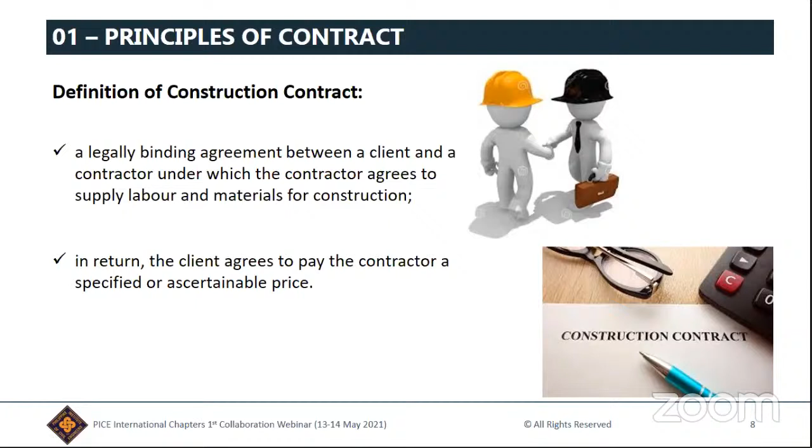So moving on, let us briefly go over the 5 common types of contract, or the different types of payment mechanisms available in a contract. I am sure you are all aware of these mechanisms, so let us have a brief description. The first one is the lump sum contract, where a detailed measurement will not be required. If there are no variations, then that amount is what the contractor gets paid. The contractor is responsible for errors in the BOQ, and changes are measured against contract drawings, not the BOQ. This type of contract is usually applied for building works or any other project type when the client wants cost certainty at the very start, so the cost risk is higher on the part of the contractor.

Next is the remeasurable contract, where it may either have a contract sum or only a schedule of rates. The actual quantities are measured according to the standard form of measurement indicated in the preambles, and the quantities set out in the BOQ are estimated quantities for the works, or say indicative, not to be taken as the actual and correct quantities to be executed by the contractor in the fulfillment of his obligations. So the unit rates in the BOQ or schedule of rates remain within the full duration of the project unless agreed otherwise. This type of contract is usually applied for infrastructure works where the cost risk is higher on the part of the employer.

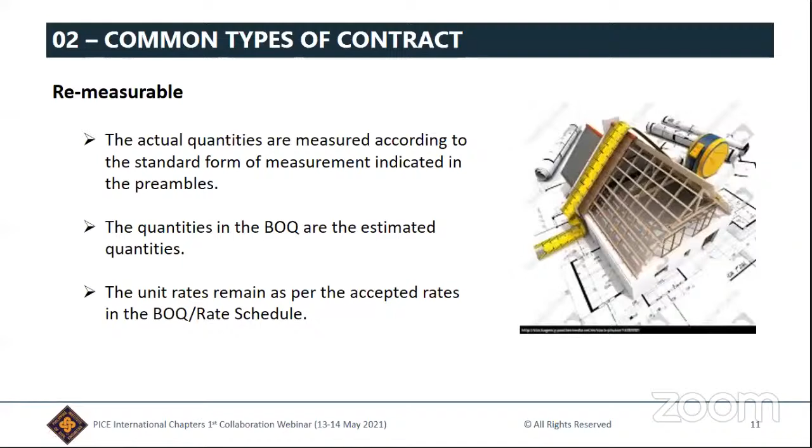Now let us see the next three. There is also a target sum, where a fixed price is established like a lump sum contract for this type, but the overspends and savings will be split between the employer and contractor using proportions as per contract. So it's like a shared pain and gain for overspends and savings.

And then we also have the guaranteed maximum price, or GMP, where a fixed price is established also, like in a lump sum contract, but this should be the maximum. The value can go below and the savings will be shared, but if the value goes above, the contractor will be shouldering it. This is used mostly for EPC and turnkey projects.

And now we have also the cost reimbursable, or cost plus. This type of contract is mostly used for urgent works, like if there is a fire, for example, in a retail shop, the works need to start ASAP, and because it cannot go through the long process of tender, this cost plus is commonly the option. So the employer has to pay for the actual cost incurred in the delivery of the project plus an agreed profit fee. In this case, the allowance for wastage shall not be more than 5%.

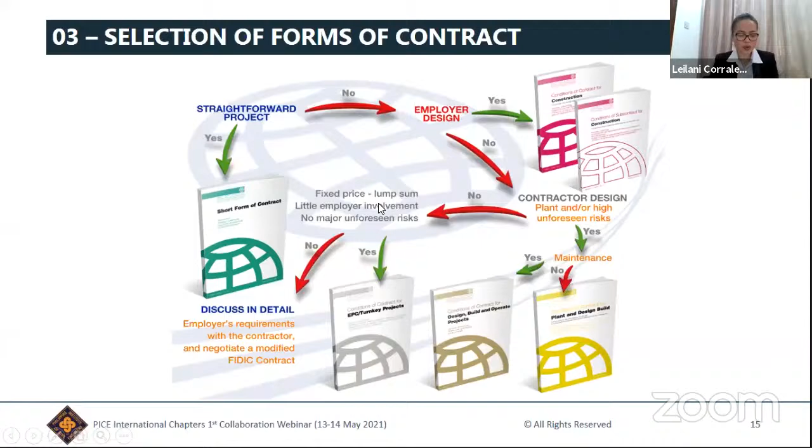So to supplement this decision tree or flowchart-like diagram, I have listed some elements we need to be aware of when selecting a contract: the type of the project, the value of the project, how complex it is, the design responsibility and risk allocations, the level of cost certainty, and the degree of involvement of the employer.

The selection of the form of contract must be established before the tender and procurement stage, because this COC forms part of the invitation to tender documentation or the pre-contract stage.

Since we are already talking about FIDIC, let us identify some key differences of this standard form from the 1987 version, 1999, and the latest 2017. In this slide you will see some of those changes. From the 72 clauses in 1987, it had been compacted and modified into 20 clauses in 1999.

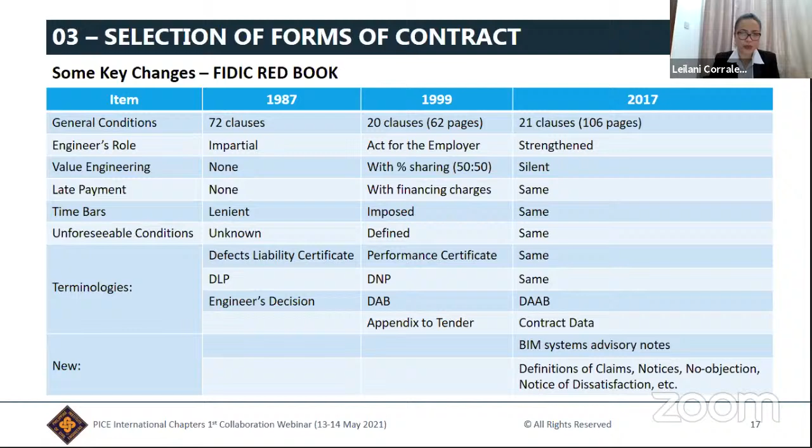I want to highlight the advantages and disadvantages of using a standard form of contract versus the bespoke form. In a standard form, all parties are well aware of the risks, and this has proven and passed the test of time. Could you imagine the JCT, the FIDIC 1913, 1931? When using this form, the contractor's proposal will be competitive, or his tender cost will not be overpriced because of the contractor's familiarity with the clauses and risks. Post-contract disputes are likely to be less, and for any ambiguity, there are precedent court cases which can serve as references in case a conflict escalates into a dispute.

The disadvantage of using these standard forms is when a client modifies a lot of terms in the appendix to tender, which is very common in the GCC region. If this is done without good professional advice, it will create more ambiguities in the contract.

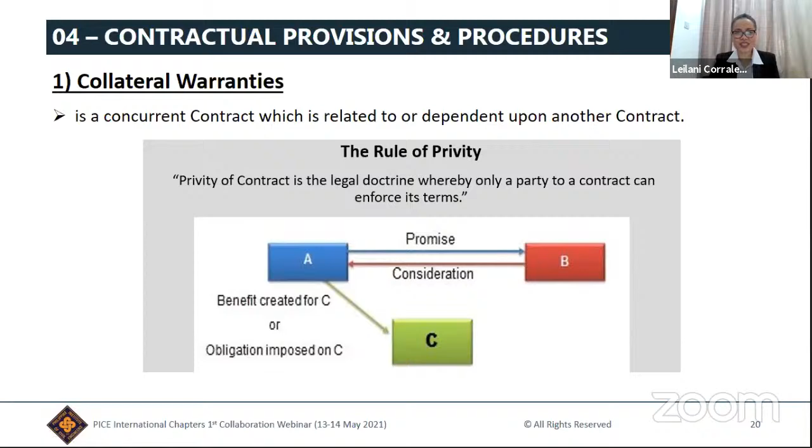Now, in an ideal situation, the collateral warranty agreements are issued anytime after the signing of the original contract between the contractor and the subcontractor, in favor of the employer.

However, in most of the project experience I have dealt with in main contracting, the CWAs are commonly issued at the last stages of the project, or it had been made as one of the conditions for closing out. So if at the start we are busy issuing and finalizing subcontract agreements, at the last stages we are as well busy issuing and collecting collateral warranties from the subcontractors in favor of the employer or the end user.

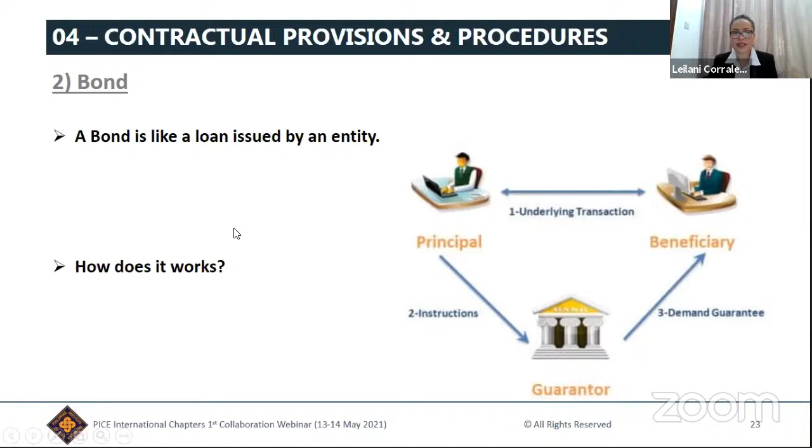So the bonds commonly found within project documentation are the following. First is the performance bond. As said earlier, this is a security for the employer in case of the contractor's non-performance of his contractual obligations.

We have also the advance payment bond. This is a guarantee for the employer that they will be able to claim back all or part of the advance they have paid to the contractor, in accordance with the commercial terms of the contract. The value of this bond is dependent on the amount issued, and it will expire once the advance payment is repaid.

Then we have the retention bond. This is an alternative to the normal withholding of an amount from the contractor's periodic progress payments. This may reduce when the taking-over certificate of the project is issued, and the remaining value becomes valid until the expiry of the defects notification period or the issuance of the performance certificate.

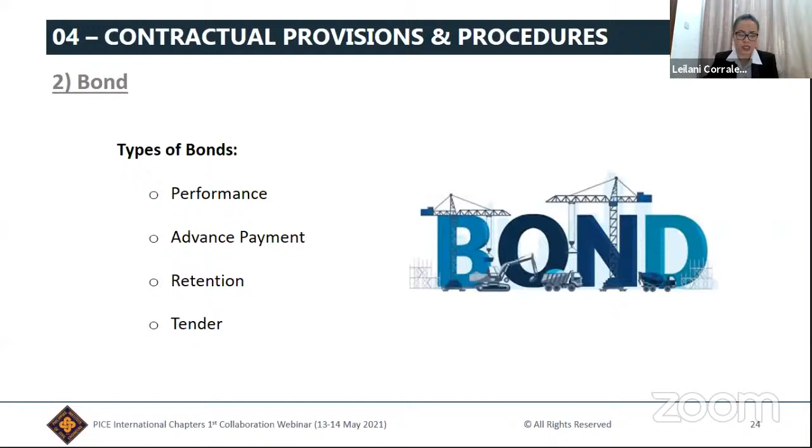The calling of the bond is considered unfair under the common law. If a bond is liquidated, it will significantly affect the contractor's cash flow, his reputation, and even his future business opportunities will also be affected. That is why in the contract, there are protections and remedies for the contractors.

This could be ensuring that the bond has a fixed expiry date rather than being conditional on the expiry of the defects notification period or the issuance of the performance certificate, which can normally be extended far longer than planned. So some performance bonds contain notice provisions, which give the contractors time or an opportunity to remedy any default.

Next is the provision of compensation clauses. Like in FIDIC 1999 clause 4.2, it says that employers are obliged to compensate all damages, losses, expenses, including legal fees, to the contractor where a wrongful demand of a performance bond has been made. This clause is a good protection to the contractor. The employer cannot just call the performance bond without any valid basis. The contractor can also obtain an injunction from courts.

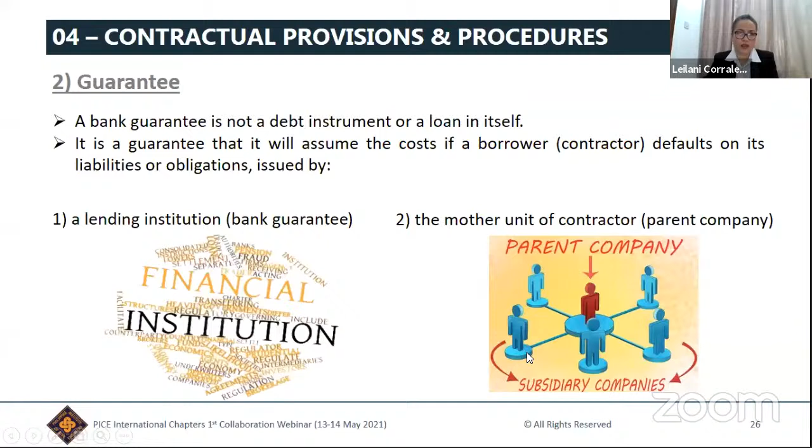Now let us move on to insurances. Insurance is defined as an equitable transfer of a risk of a loss from one entity to another, in exchange for a payment in the form of a risk premium. It provides financial compensation for covered losses, as many mistakes, errors, and unforeseen events can lead to damages and losses during pre and post-construction stages.

The risks are defined either under the contract or under the law. Risks under the contract could be natural calamities like flood, typhoons, major fire, or anything that destroys the work or impedes delivery of the project, or risks defined under the law. An example of this is decennial liability, which we will be tackling a bit later.

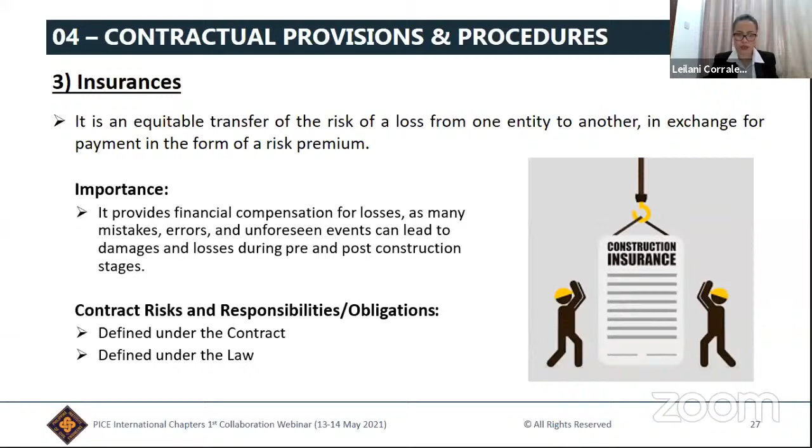So what are the insurances that you would expect to see in a construction project? Here, for the JCT and FIDIC forms, there are 3 common insurances, although you may notice slightly differing terminologies. These are the insurances for the works and the contractor's equipment. Under JCT, it is called the contractor's all risks, while in FIDIC versions, works and goods.

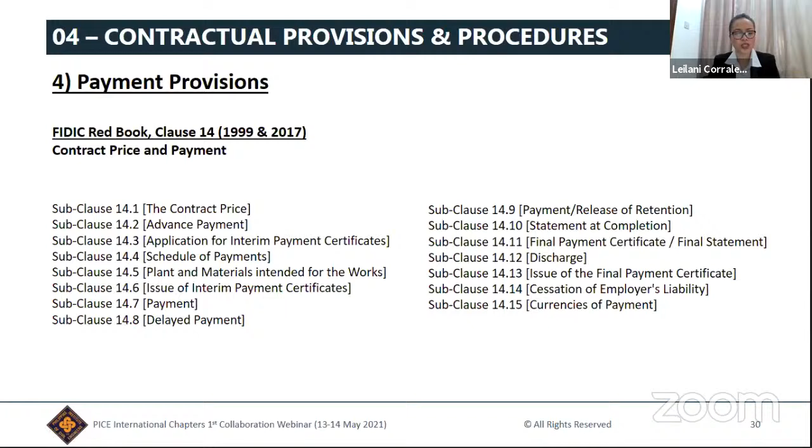Okay, so my next question is how important payment is. That is the next slide. So payment provides benefits to everyone, right? It keeps a smooth functioning of the economy, not only to the contractor, but anyone down the payment chain.

So the first one is the advance payment, which is an interest-free loan for mobilization purposes. This payment is released when the contractor submits the advance payment guarantee and performance guarantee. Sometimes as a precondition to the release of the advance payment, the insurances or proof of insurance buying and payment expenditure plans for subcontract practices are also added to the requirements. So it depends on the contract, what else is added for the prerequisite of releasing an advance payment.

And then for the interim payments, this has to be paid by the client on a periodic basis, normally on a monthly basis, for the purpose of relieving the contractor of the burden of financing the whole of the works until completion, especially for projects which may take months or even years to complete. So it basically helps the contractor in his cash flow.

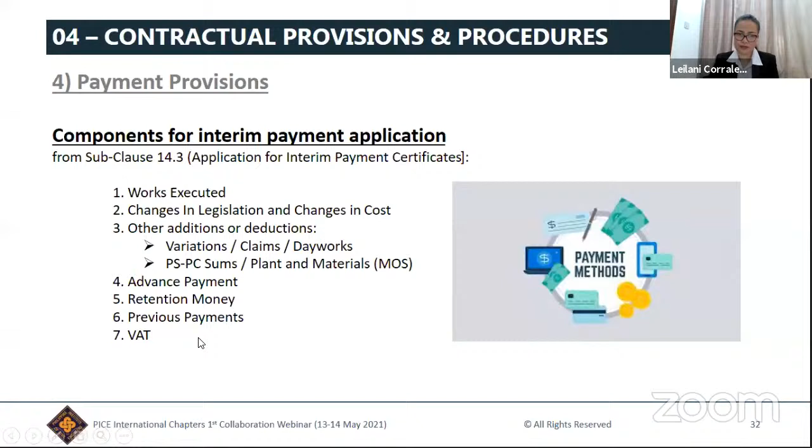Now we proceed with how important evaluation process is.

This is a formal contractual process actually, being done whether in advance payment, interim statement, at completion, or final account, which normally follows a method and criteria for valuing an activity. So the works applied by the contractor shall be validated and issued with a payment certificate by the engineer in respect of the FIDIC standard form, or the contracts administrator in respect of the JCT, or the project manager in respect of the NEC.

So the meaning of value is sometimes, oftentimes, the subject of dispute. I hope you agree with me on this. From the contractor's point of view, he may say that the value is found in the BOQ, where we are entitled for what has been done at bill rates plus a proportion of the prelims, which is correct. But from the client's point of view, he may say that the value is the whole of the contract less the cost of completing the work, which is as well logical.

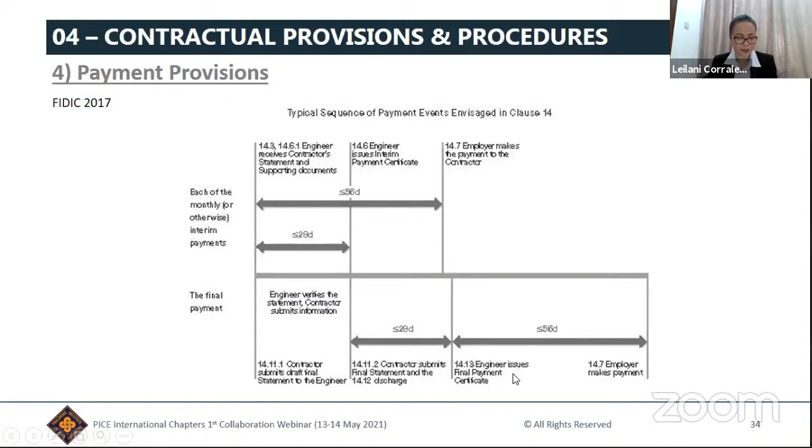Okay, let us proceed to another interesting contract provision, which is the variation or the change order. Let me just have some water.

Okay, we are in variation or the change procedure. So in JCT and FIDIC, the description of change is called variation, okay? While that of the NEC, it is termed as compensation event. So interchangeably, we are using all of these terms actually in our work.

So when does a change arise? Actually, there are many events that could result to change or alteration to the original contract, and this includes the ones on your screens now. It could be changes to the design, changes to specifications, method statements, scope of works, and to statutory requirements if there are new legislations or repeal of existing regulations. Also changes to specified sequence or timing or to the program. It also includes the events of force majeure, or the use of technical innovations or new technologies, and if there are unresolved qualifications prior to contract signing, and value engineering activities as well, among other things.

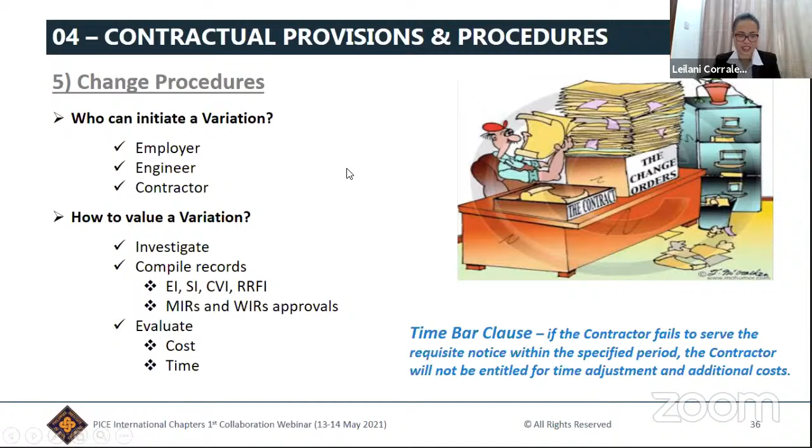Another item related to claims is the extension of time. An extension of time is defined as the extended period granted to the contractor under valid events, allowing him to achieve completion of the works as per the agreed revised date.

As per FIDIC Red Book of 1999, subclause 8.4, the EOT events can be due to variations, cause of delay as per the contract conditions, and adverse climatic conditions. It could also be due to shortage of labors and goods, and of course, employer's default.

By general principles, an employer's delay is categorized as excusable and compensable, while a neutral delay of employer and contractor is categorized as excusable but not compensable. We also call this neutral delay a concurrent delay, where both parties shall bear their own loss.

An extension of time will be awarded at the expense of the employer, but no cost for the contractor, so the contractor will bear his own loss as well. In the Society of Construction Law Delay and Disruption Protocol, it favors the grant of EOT but no cost in case of concurrent delay, unless the contractor can separate out the cost related to his delays and the delays caused by the client. So the onus lies within the contractor, and it is somewhat difficult to proceed with this.

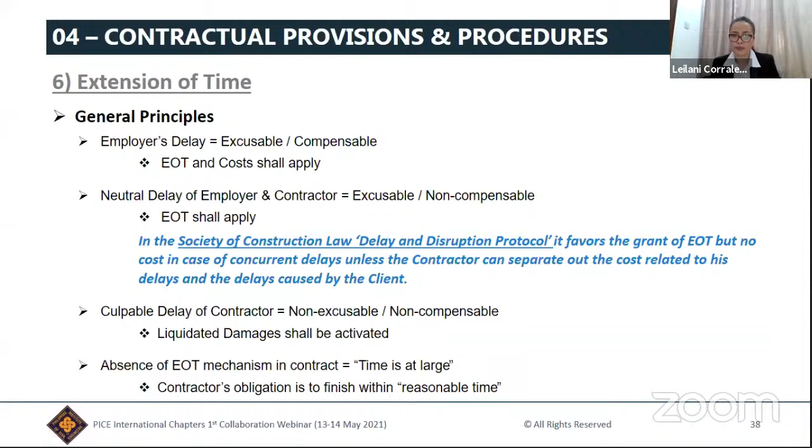So for the unforeseeable physical condition, discovery of fossils, and even the suspension consequences and changes in legislation, employer's risk and force majeure, all of this warrants for an extension of time with associated cost, but not for the profit.

It could also be due to variations or other substantial changes to the work, where EOT or extension of time and cost and even profit shall apply.

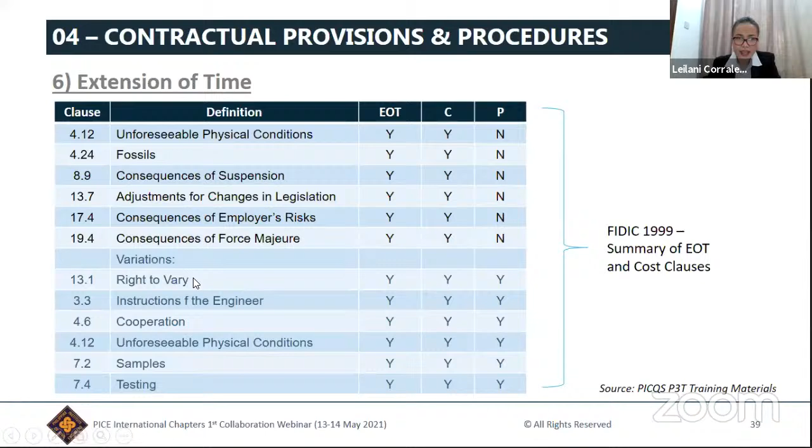Also for implied variation, sometimes dependent on the nature of that variation, EOT, cost and profit will all be applicable. And then for exceptionally adverse climatic conditions or unforeseeable shortages of availability of goods and personnel even, caused by epidemic or governmental actions, and even delays caused by authorities, it warrants also for the extension of time, but not for the cost and profit.

I just want to add that in the award of an extension of time, there are delay analysis techniques used by the planners, like the impacted as planned versus as built, collapse as built, time impact analysis, window analysis. Yes, so these all fall under the jurisdiction of our planners.

So I repeat that an award of an EOT may not always come with cost. When an EOT is determined, and if that event falls within the compensable category, the contractor can as well be entitled to a prolongation cost, which normally covers admissible items like the site overheads or the preliminaries.

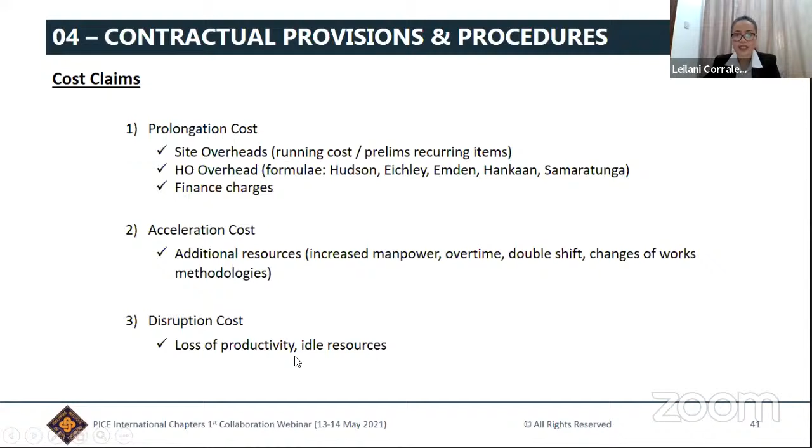And finally, we are in the dispute resolution and arbitration clause provisions. Actually, there is no better way to address issues and resolve conflicts before they escalate to dispute than by using dispute resolution techniques, which are introduced as part of the civil code rules.

And then we have also the mediation, where a private and structured form of negotiation assisted by a third party that is initially non-binding. However, if the settlement is reached at this level, it can become legally binding as well. The result will be legally binding dependent on the agreement of both parties.

So we have also the conciliation. It is the same as mediation, only that the third party conciliator can propose a solution, contrary to that of the third party mediator. The mediator is there only to listen and to facilitate the negotiation.

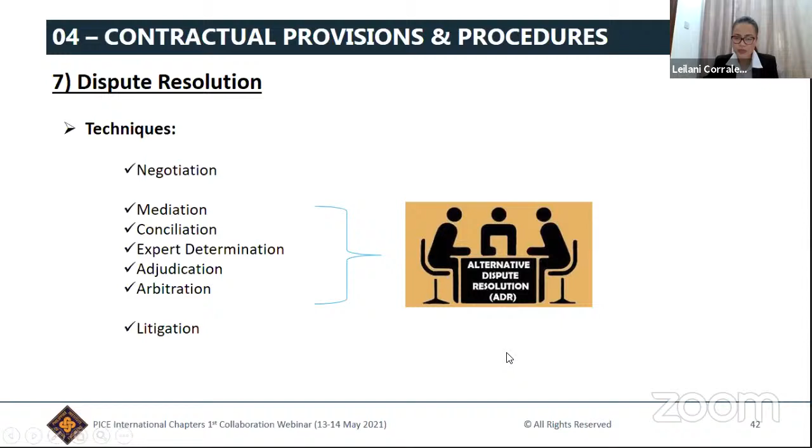In a construction contract, this dispute and arbitration clause is very vital because we all know that the construction industry is subject to more risk and potential disputes than many other industries because of the physical nature of the product itself. The projects can be very large in size, require high capital requirements and wide geographical requirements, and the parties involved are too many.

So the causation of disputes is also wide ranging. It can be from the employer, due to changes in requirements, or because of many contract ambiguities, or even late issuance of payment to the contractor. So those are causes of dispute.

And then from the engineer and consultant side, due to design issues and inadequacies, it could be due to late issuance of drawings or information and even determination, and lack of competence and experience.

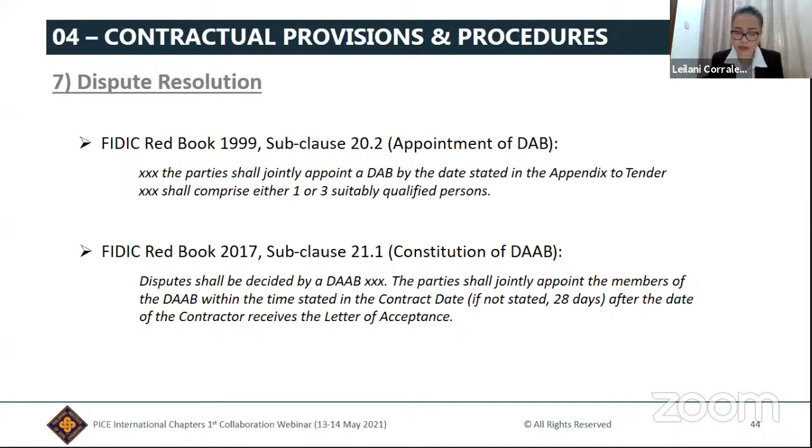So the last contractual provision is the termination. Termination can be done mutually or through court order. In the FIDIC 1999 Red Book, clauses 15, 16, and 19 include the basis of termination. It could be done by the employer due to the contractor's default or due to convenience purposes.

So the only difference between default and convenience is that for default, the employer can terminate the contract and award the project to some other party to complete it, while for convenience, he will terminate the project not for the purpose of awarding it to another entity.

For the termination by the contractor, if the contractor is suffering delayed releases of payment, then that is one ground for applying a notice of termination to the employer. Under clause 19, force majeure, if the situation is prolonging, then either party can submit a notice for termination.

Okay, so there you go. There will not be a good way or good time to terminate.

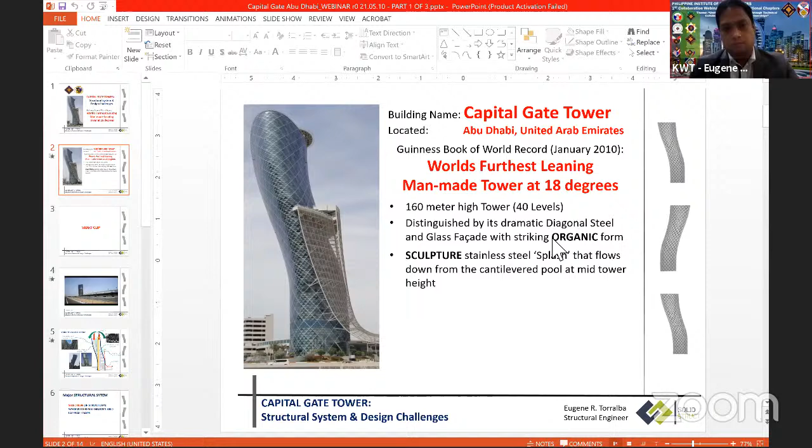Okay, so the project is called the Capital Gate Tower, situated in Abu Dhabi, in the United Arab Emirates. In January of 2010, the project was recognized by the Guinness Book of Records as the world's furthest leaning man-made tower at 18 degrees. It was 160 meters, basically 40 levels.

For now, if you pass by the exhibition area, it will be distinguished by its dramatic diagonal steel and glass facade with a striking organic form. There's a sculpture, a stainless steel splash as we call it, that flows down from the cantilever pool at mid-height level, as you can see in this portion.

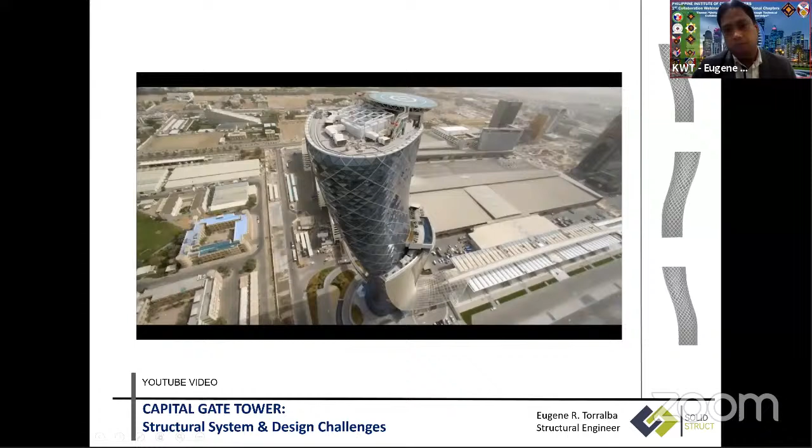Okay, that was a short video, and there's a lot of video available for this project on YouTube actually.

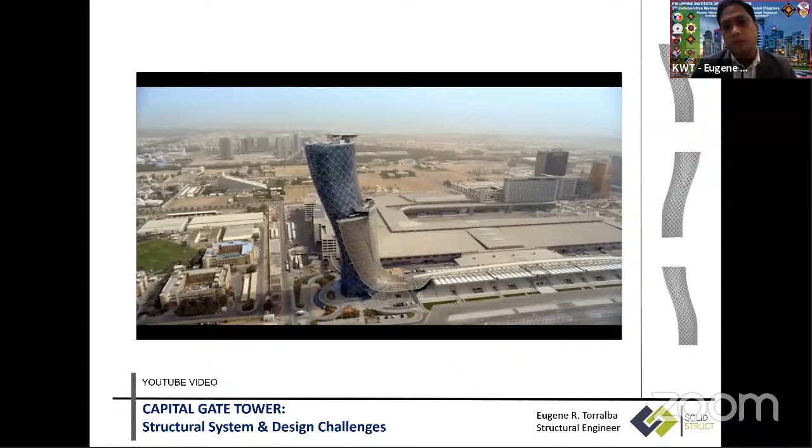Okay, so let me first discuss the system in general. The first system is what I call the vertical elliptical core, which, if you can see the organic form, is the only vertical element of this structure. Then we have the external organic form on the other side, which is basically what the architect intended to achieve. There are two videos of the actual construction showing how this organic shape was formed.

Internally, there is what we call the funneled shape atrium inside. Architecturally, during the design, they wanted to invite natural light from the top, so it will serve as providing natural light to the restaurants that they will have in this area at mid-height. Right now, half of the project, the lower portion, until the halfway point, is the ADNEC office in Abu Dhabi, and the upper half is now called Capital Gate Hyatt Hotel. The main lobby, or the reception area, will be found there. That's one of the features of this tower.

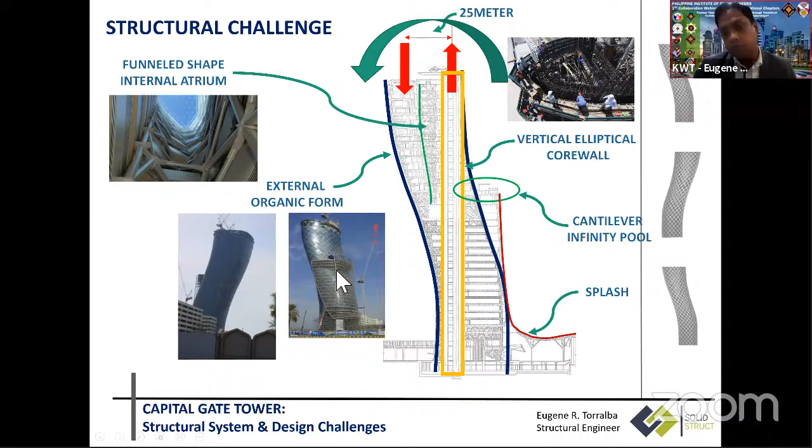And in the mid height of the building, there is what we call the cantilever infinity pool, which is on this side. And from there, what we call the splash, which is this aluminum stainless organic shaped screen, is actually hanging from that cantilever, full down until it merged to the existing

exhibition hall grandstand, which is the main historical place in Abu Dhabi. So the idea when we were discussing this with the architect at that time is that since the grandstand is a very old structure with very simple precast seating for military exercises, and beside it you will build this very modern building, they wanted to have this splash from the tower go over to the old exhibition area, so that it will create some harmony between them.

So my discussion is basically going to be on how we managed to solve this building by introducing to you the major structural system for the building, and the selection of the structural system to resist both gravity and lateral loads.

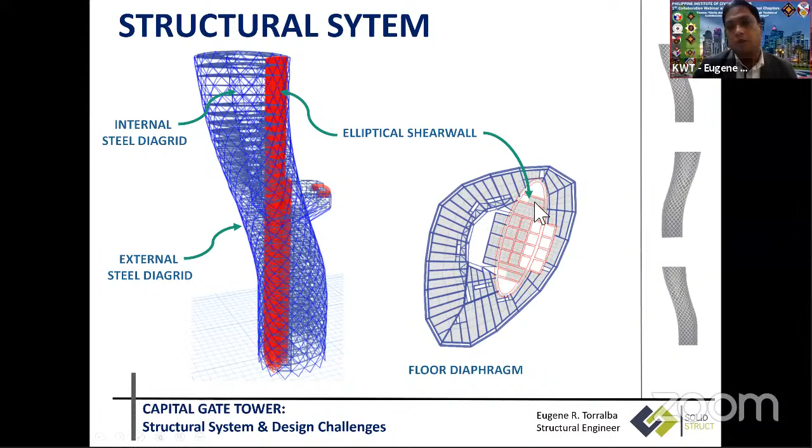On the outer skin, we have the external steel diagrid. Internally, where we have the internal atrium, we also use another internal steel diagrid. The floor, of course, will act as a floor diaphragm.

And then in the middle, or in the heart of this building, there is one column that, when I started reading some documents and articles that people wrote about how this building was solved, was the only one not discussed by anybody, as far as I know. To tell you honestly, this was the last addition to the system that we introduced as a team, because we were not able to solve a lot of areas without it. This addition contributes a lot to the structure, but it was never noticed because it's inside the structure and not visible at all. So I call it the inclined column, which I'll be discussing later on, one by one.

And the last one, of course, after all the systems of the superstructure, is what we call our deep pile foundation. So this is how we support it on the ground.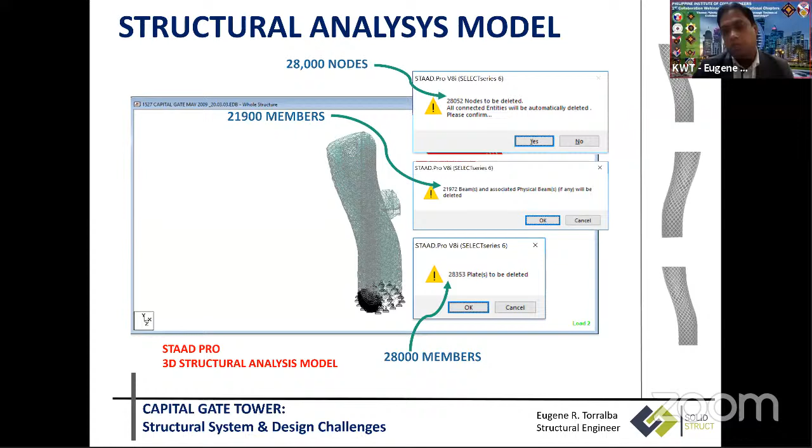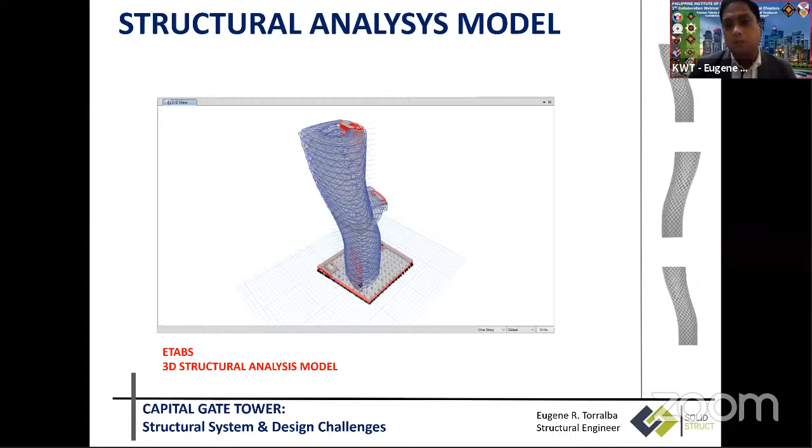So I did it again using the ETABS structural analysis model, which you can see on the screen. I captured it and I was able to complete it also. And finally we got some sort of analysis that shows how the loadings, etc. will take place, so we can start with the design process.

As you can see in the video, I was fortunately able to get a copy because it was a very long time ago, but at least it's still running. To tell you honestly, during the time I ran this model, around 2007-2008, it took me 8 hours to run one run for this structure.

So anyone, especially those working in structural engineering, will realize that it took a lot of time to run. And since we do a lot of iterations in the structure, because in the beginning the system is assumed and the sizes are assumed, every time we change one member's size, for example, we have to rerun it. And 8 hours means when I reach the office, I have to click the run button and wait until the end of the day to see the result, whether it's passing or not.

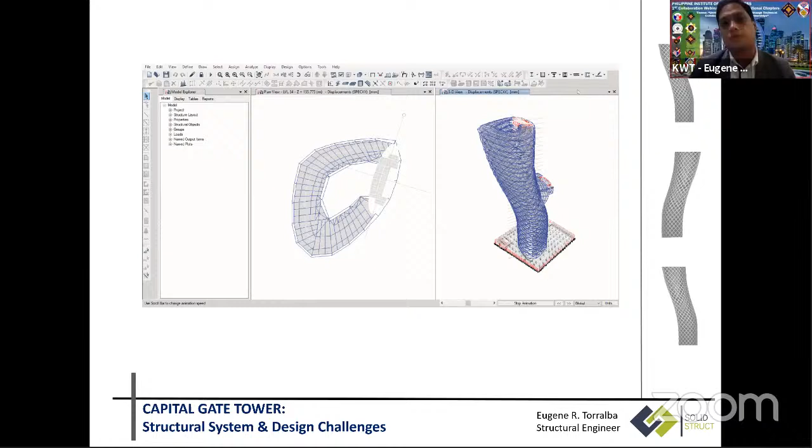Okay, I'll open my next slide. The slide is a bit heavy because of the videos, so I couldn't put it all in one. But just bear with me, I'll open my next slide.

So I will discuss to you now the system. Okay, let's start. Basically, if you can see here, I have listed the structural systems that comprise the structural solution of this.

The video seems unclear, there are some messages. Hello? It's just buffering, sir, a bit laggy. I think there's something wrong with my video. It's okay, sir, just a bit laggy, but it's still there. Okay, try sharing again. Okay, let me share it again. One minute, what's wrong? Okay sir, we can wait.

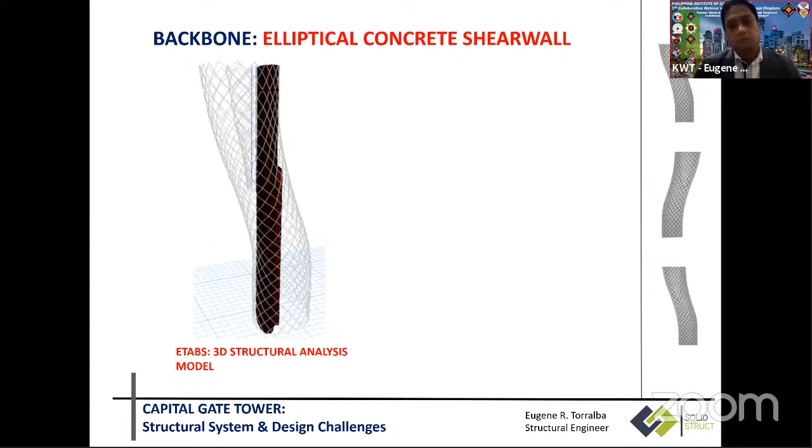which is the elliptical core concrete shear wall of the building. As I mentioned earlier, this is the straight portion, or the only straight portion of the structure, which is elliptical in shape, as you can see here in plan. I call it the backbone, and I was relying on this to keep the structure upright.

I'll show you the plan. These are the plans of the tower, where you see on the ground floor. If you notice, the elliptical core is actually on the left side of this floor plan, but you have to imagine that the core is actually the straight part. So as you go up, the floor plan slightly shifts to the left.

You see, on the 19th floor, you can see the difference between the shear wall, the elliptical shear wall, and the floor plan is more to the left, until it reaches the topmost, which is the 30th or 35th architectural floor level, but actually it's like the 40th structural level. So you will see the elliptical core, the straight part, at the rightmost of the floor plan. That's the transition, so it's clear that the floor plan shifted.

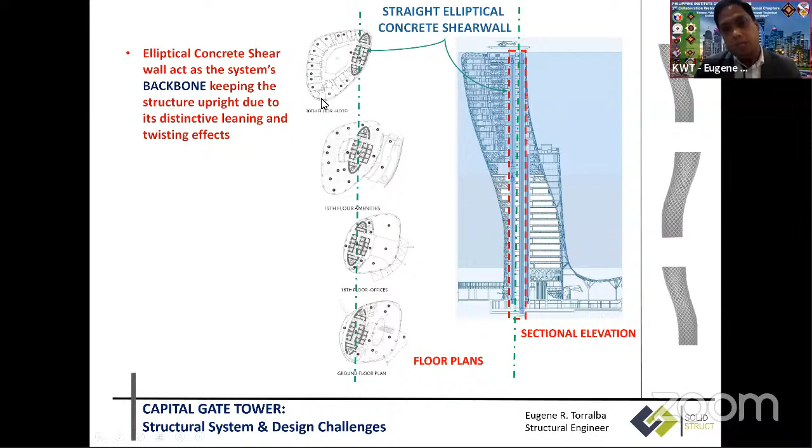Taking the elliptical concrete shear wall as our reference, it acts as the system's backbone, keeping the structure upright due to its distinctive leaning and twisting effect. I said twisting because at the same time it shifts from this position towards the left, the mass of the structure shifts too, as you can see here. This is the elliptical core at the top, and you can see more or less where the mass of the structure is located.

Compared to the one below, maybe the mass is very close to the center of mass of the structure, which is somehow very close to the core or in the middle. So at the same time it shifts, and at the same time it twists.

The core construction actually utilized a lot of innovative techniques. Number one, which is also number one as far as I know in the world, is that we use a pre-cambering shear wall. This is also a technique that we use to solve especially the drift issue of this building. We use a pre-cambering wall, and we also implement vertical pre-stressing on the concrete shear wall.

As a lot of designers normally see pre-stressing or post-tensioning on a slab, meaning on the horizontal element, because this is where it is effective. Since, for example, a column or shear wall is predominantly in compression, if you add vertical pre-stressing, people will think you're crazy because you're making the situation for the column or core wall more critical by adding this vertical pre-stressing.

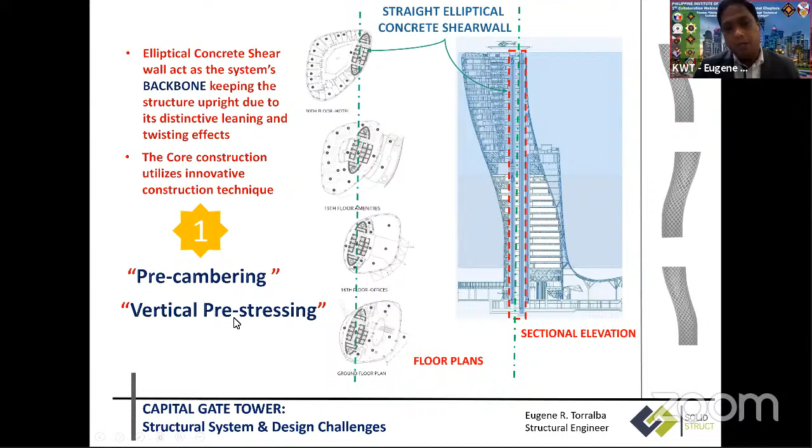Let me show you a video on what it is.

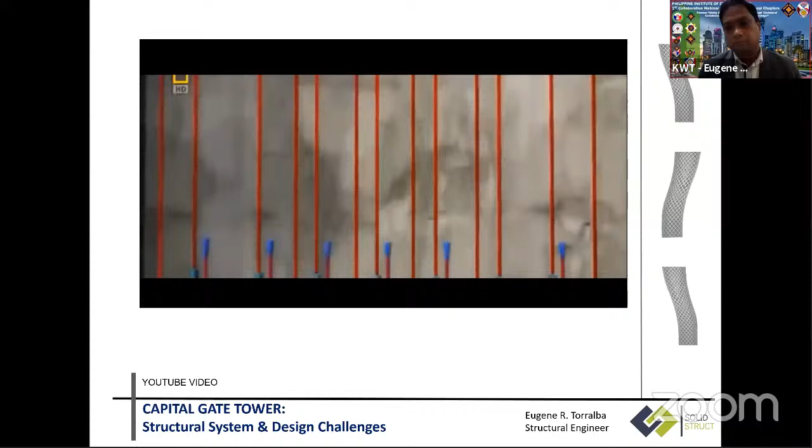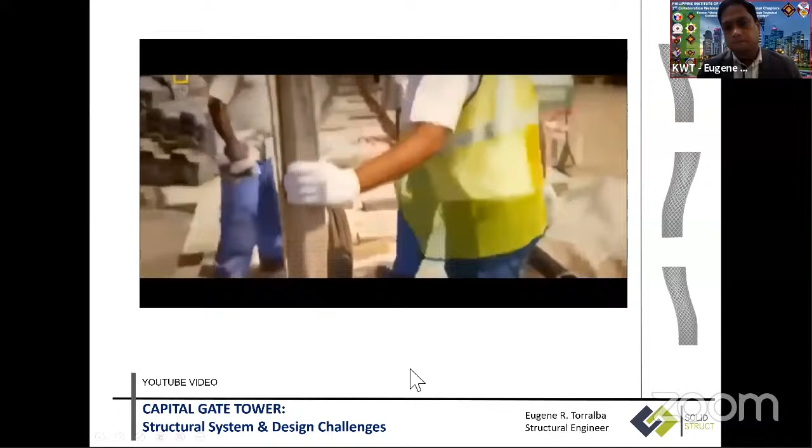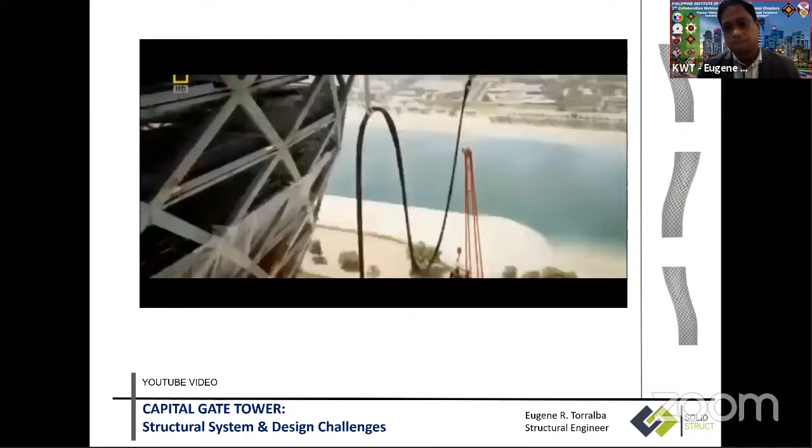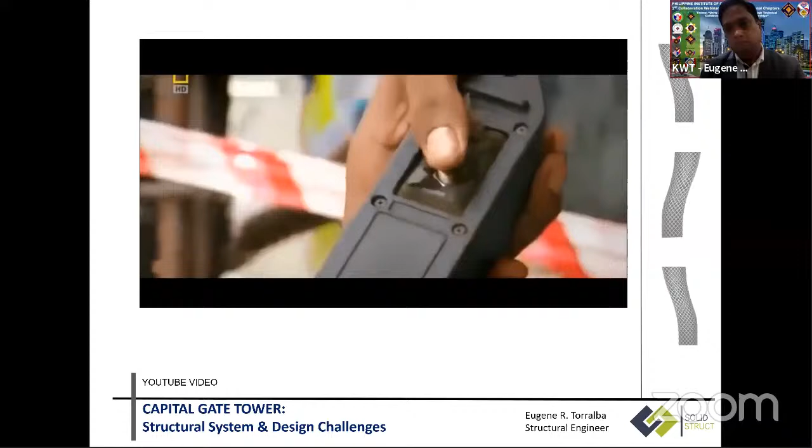Tendons are threaded vertically through the concrete. Each tendon is 20 meters long and runs through 5 floors of the building, overlapping each other for maximum strength. When the tendons are stretched, the stress counteracts the pulling force created by the massive overhang, stopping the concrete from tearing apart. On site, the team are post-tensioning the core, but no one has ever attempted this vertically in a skyscraper. The long tendon is lifted to the top of the core. The team used the steel tendon's weight to force it through a duct already cast through the core. Once the tendon is in position, the team lock off both ends, ready to tension its individual strands. A hydraulic jack clamps around one.

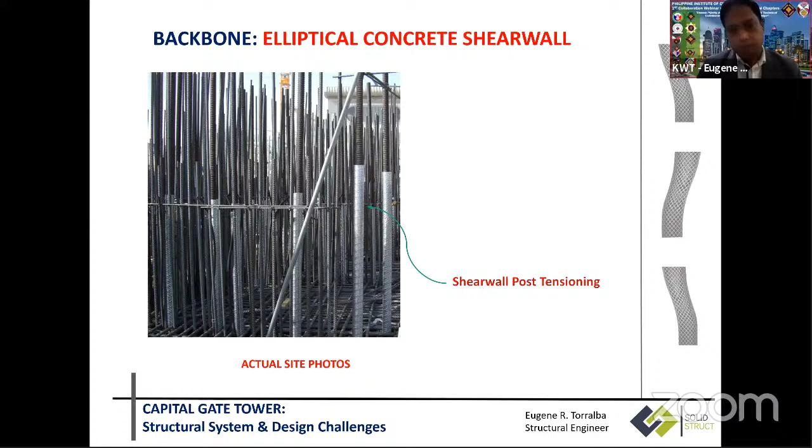Steel tendons are threaded vertically through the concrete. In the actual photo, you will see that there are tendons that are part of the vertical reinforcement of the core wall. These are the shear wall post-tensioning tendons, and this is also an actual photo of the overview of the elliptical core wall when it reached the upper level.

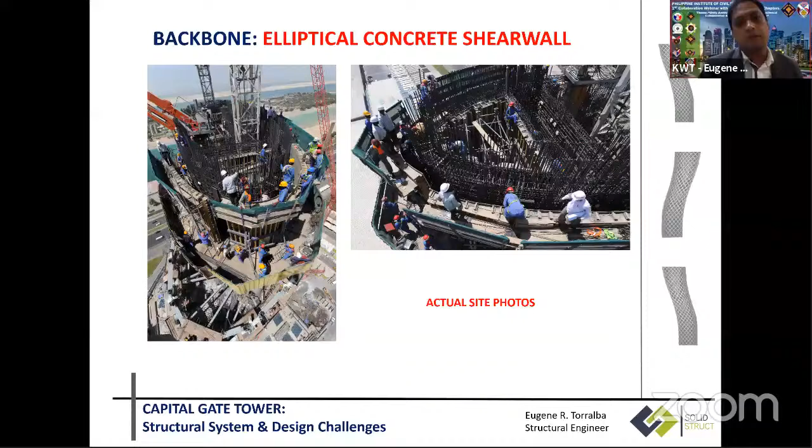Considering the fact that the organic shape has been approved, and this is what the client wants for the country, probably because this is for the country in the exhibition area, we tried to find a system that can shape similar to the architectural intent. This was probably the only option that we could go with to satisfy the intent of the project. So the only options at that time were whether it's a concrete diagrid or a steel diagrid, and eventually we selected the steel option.

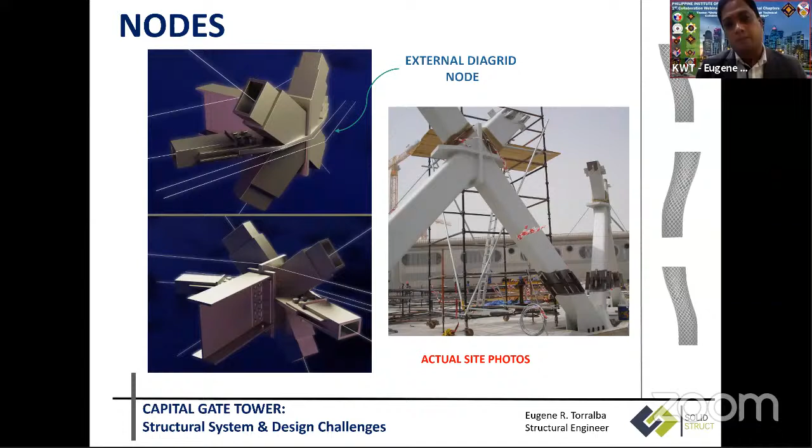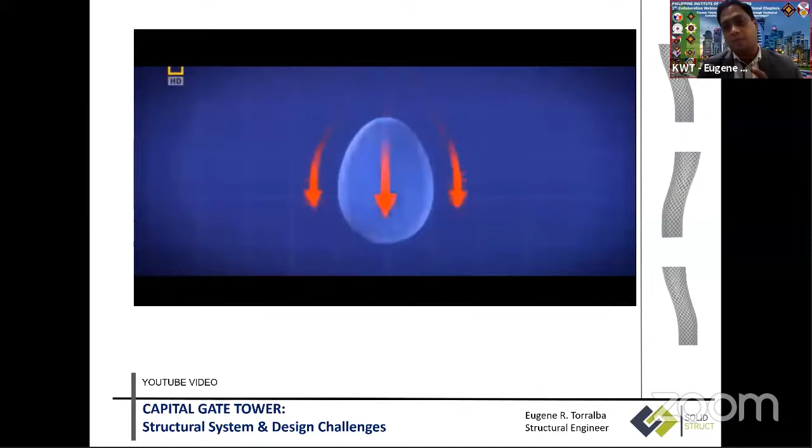So you have to have some beams or members in the out of plane, to hold it into shape, to keep its position out of plane. Kasi in plane, it will act like a membrane, which is very, very strong.

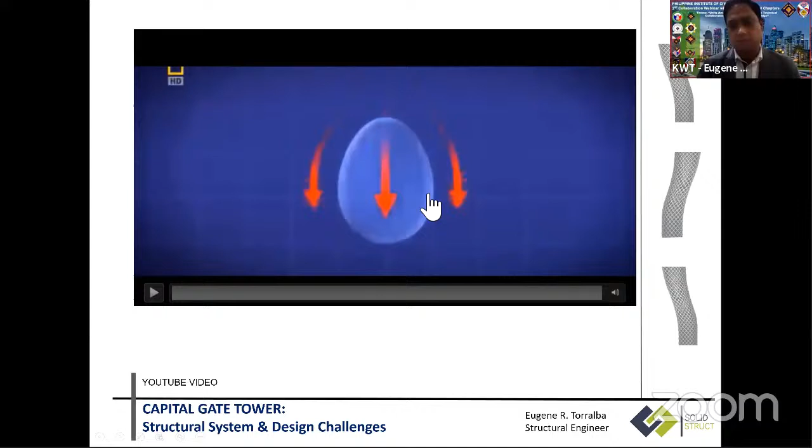Okay, next is the internal diagrid, which I call the internal shell. This cavernous hole is good news for reducing weight and minimizing forces, but the atrium is a double-edged sword. The floors are critical in transferring loads from the diagrid to the core. A giant hole through 18 floors means these loads must find another pathway.

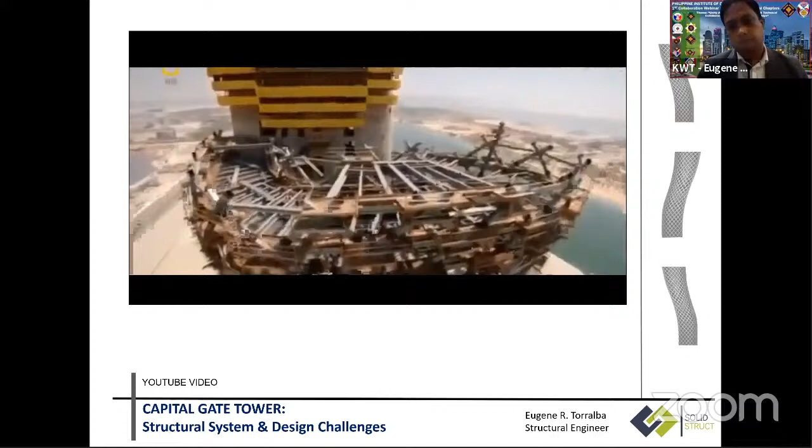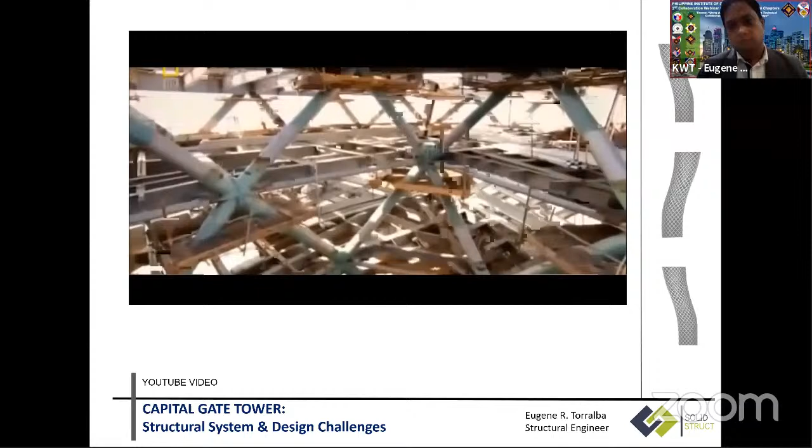The forces need to flow away, and the solution is pioneering: an internal web of steel mirroring the external. This funnel-shaped internal skeleton carries the forces of an 18-story building down to its tapered base and into the core. But the loads are extremely high for such a small area. To stop the atrium punching through the core wall, the concrete needs protection.

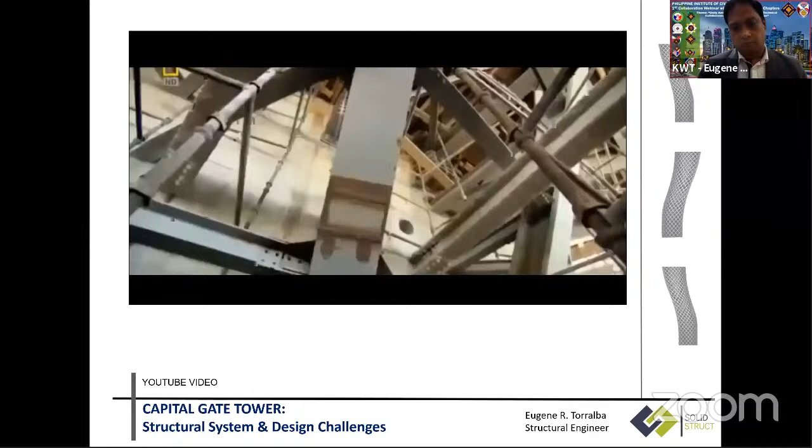Okay, so that's the definition of this core wall, internal diagrid, or internal shell, or what we call the internal diagrid. This matches the funnel that suits the architectural funneled shape internal atrium we have here. So we use the internal diagrid.

At the bottom, as you can see here, it looks like it's hanging, because in reality we need a transfer floor here, a transfer structure, to support this internal diagrid, because it started at the mid-height of the building. So actually that's the fourth system, which is what we call the transfer structure.

So if you can see in this model which I extracted again, the diagrid stops here, and we introduce this steel transfer structure. To tell you, in the beginning we used a concrete transfer structure instead of the steel element, because we were thinking of building something more solid, more massive, to avoid issues and for better deflection control. And then this internal diagrid would sit on top of it.

But we have an issue when the contractor proposes a jumping form. If you can remember, this is our backbone, the elliptical concrete shear wall, which is actually typical. The outer face is typical from ground to up. So the contractor, to speed the process of construction, uses the jumping form. So imagine if we have a concrete transfer beam sticking out here, it would interrupt the jumping form.

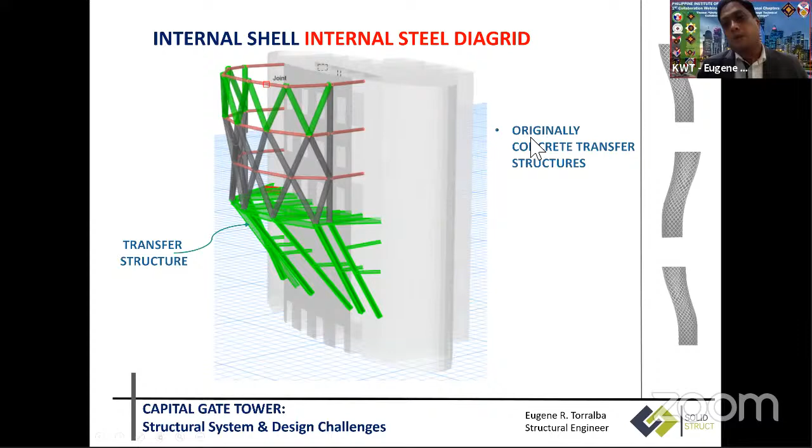That's why in the last minute we changed the concrete transfer to a steel transfer structure. Okay? That's why it was originally a concrete structure.

So the next system I want to discuss is what we call a collector, or the diaphragm. The challenge here is this is a typical floor plan from ground floor to level 16. As you can see, the elliptical core, and the floor actually does not have any opening here.

From level 18 up, the funnel-shaped atrium creates a huge void in this floor plan. So at the upper level, there's another challenge when we talk about diaphragm, because normally the diaphragm will collect lateral load and distribute it to the shear wall, which is our resisting element in this project. So what happens here is if we have this lateral load, it cannot go directly to the core wall because of this huge void.

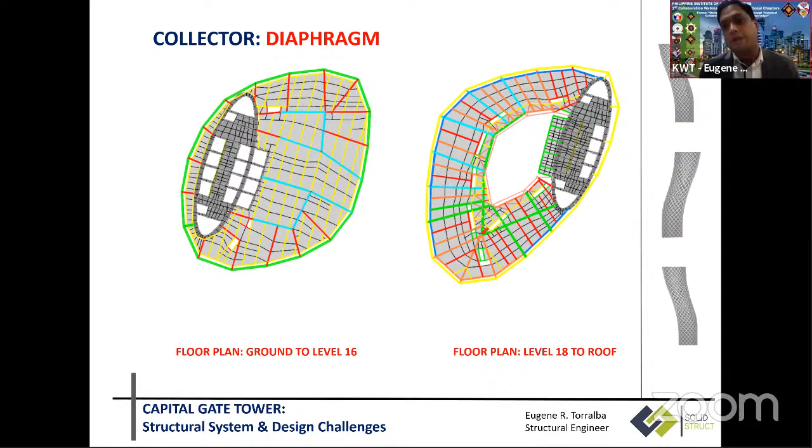So what happened is we introduced another load path to solve this issue. As mentioned in the video, this introduction of the internal diagrid is like a double-bladed sword. In reality it helps reduce the weight of the building, meaning our overturning moment becomes a bit smaller. But another problem it creates is an interruption in the diaphragm, or the transfer of lateral load, going to our main resisting element.

So in reality, this is the system: in the floor plan we have a steel beam with composite metal deck, which is part of the diaphragm component. And then of course we have the ring beam that goes around the building. By the way, this red beam here indicates the intersection of our diagrid, so every time there's red, that's also where the diagrid intersects.

So imagine that there is a node on each intersection, and then we connect it with an external ring beam.

This also happens in the upper level, so again we have an external ring beam for the outside. And since we have another diagrid for the internal, as mentioned earlier, we also have the internal ring beam. This is an additional component, and to help make sure the load will be distributed to the core, we introduce what we call internal horizontal trusses on the floor level, within the perimeter of the internal diagrid. That became one of our solutions for how we transfer the lateral load to our lateral resisting system element, which is the shear wall, the elliptical concrete shear wall.

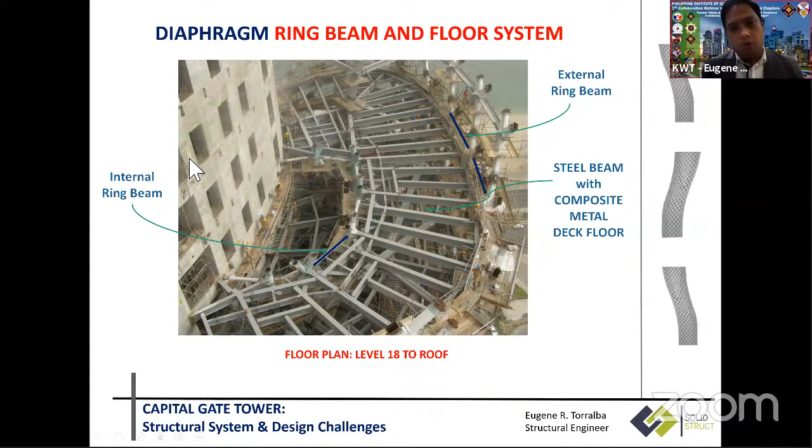And finally you will see here, in the perimeter, the horizontal truss diagonals that we added to stiffen and help the load path of the lateral load going to the core. So that's our diaphragm.

As I mentioned earlier, this important structural element is what we call the eliminator, or the inclined steel column. Also, when I went through a lot of documents written for this project by others, I did not notice anyone discussing this inclined column. But in reality, there were areas we couldn't solve in the system, especially many diagrid members that would fail, until we decided to introduce this inclined steel column.

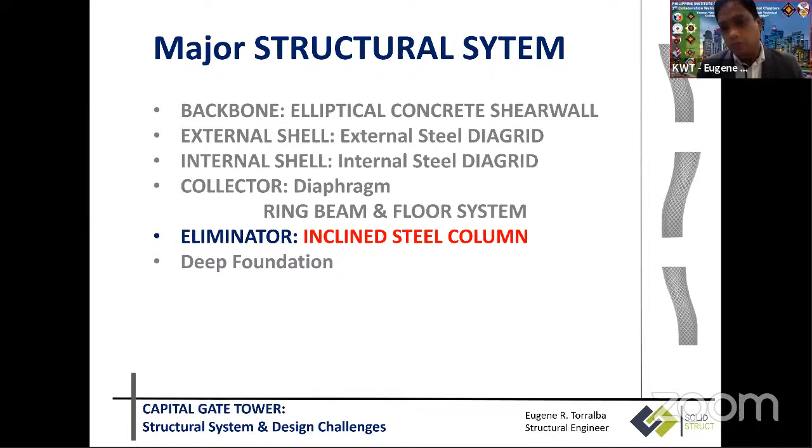Okay, so this is the diagram, again taken from the ETABS model. This is the inclined column, and it starts around level 17 to 18. At level 14, if you look, that part will be disoriented somewhere here.

At the roof, level 34, here's the diagram, the steel, the inclined column, here it is in the plan. And then it goes back to the core, which is somewhere here, so it's supported back to the core, assuming this is straight.

So that's where we placed the internal inclined column, which we actually worked out with the architect. Of course, if you have an inclined element inside your building, they have to find a way to incorporate it within the corridor of the hotels.

But again, because of that inclination, the eccentricity described earlier is around this area, where the huge weight, the mass, is around 25 meters away. So that's what we call the tendency to overturn.

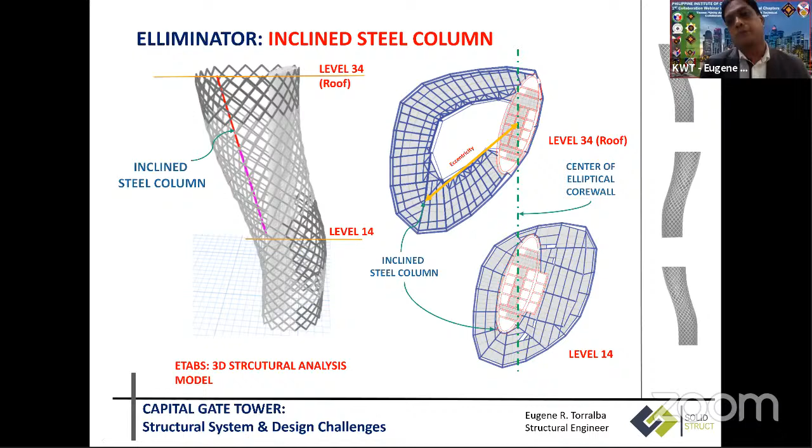So we placed an inclined column. This is again another representation showing the floor plates as you go down to level 14, and this is the inclined column that we introduced.

The tower's distinctive lean effect at 18 degrees causes the floor mass to have significant eccentricity, and to reduce its toppling effect, an inclined steel column was used to gradually shift the mass closer to the core wall. That's one thing it achieves, because imagine if we don't have any inclined column in the beginning, we would be relying on...

Assuming, imagine you have an external diagrid here, and then you have a core wall here, this floor plate on top is always supported on the outside and from the inside. So it's like a big simple beam spanning out, and the transfer is mostly bending.

But when we introduce the inclined column, more or less that transfer becomes smaller, it quickly eliminates the eccentricity of the mass.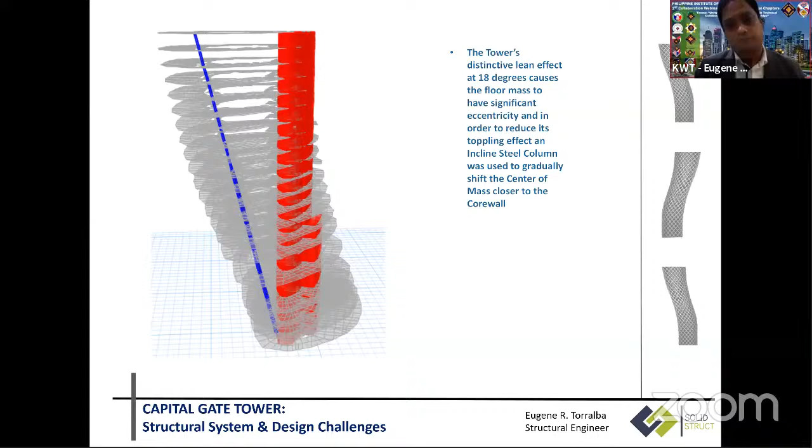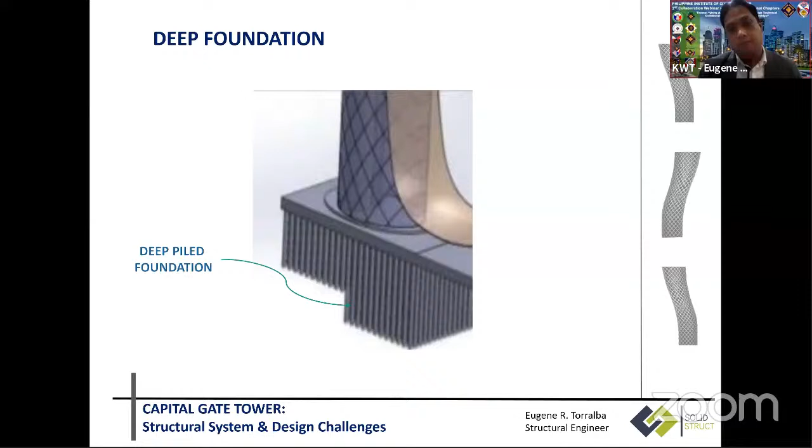And then lastly, for the 7th system, is what we call the deep foundation. As expected, the foundation is a deep pile foundation, with a 2-meter thick raft.

Totally, we used 490 bored piles, 287 of which is the 30-meter length or the main bored pile, the long ones under the tower, which is 1 meter diameter. The remaining, which is outside the tower, is the 20-meter length of 0.6 meter diameter bored pile.

Okay, so basically that's the system we used to solve the problem of this building. But aside from that, of course, many calculations happened and were made to assure that the system checks out okay. I'll open another slide so that I can explain those calculations we did to verify the system.

Okay, I'll share this slide again. This is the last slide that I have.

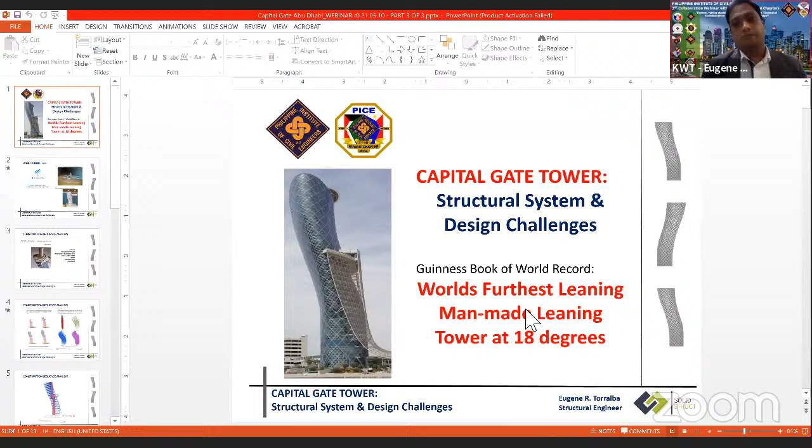So they developed the scale model and subjected it to the wind load. Of course, they provided us with the result, and then I again input it into the model to double check if the structure is still safe or if all members still pass.

Okay, after we receive the wind tunnel result, there's another sub-consultant that we sought for the design, which is actually Gifford, based in Southampton or something. Our main task with them is to study the construction sequence analysis.

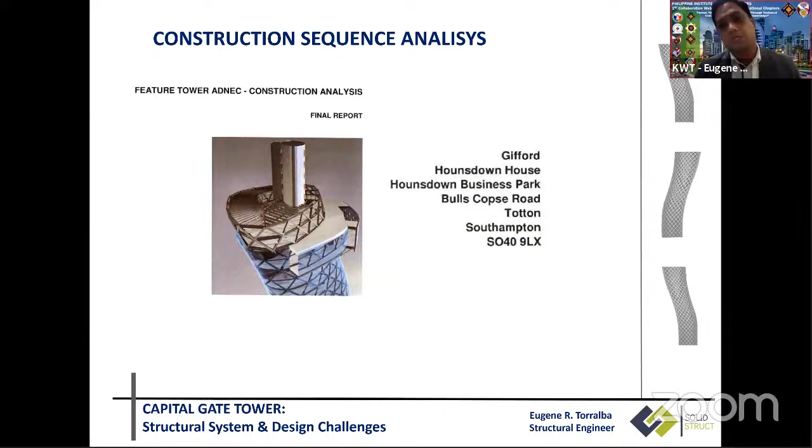That's why we hired this third-party specialist company for this. So as you can see, this is part of their report, and as they mentioned here, the ETABS model that we

created, we gave it to them, and they made a scenario of how you build it. Actually, it is part of the construction sequence analysis.

So there are, of course, different levels of sequence or schedule that we agreed on. By the way, we agreed also with the contractor so that they will follow exactly the same sequence.

For example, they build the core first, four floors of the core first, at the beginning, and then afterward they start the diagrid and the floor plan. So the core always comes first, as you can see from here.

So this is what they did from the ETABS model that we provided as a consultant. We gave them the ETABS model, and they generated the construction sequence analysis. This one uses the ETABS model, and they added the PT, the post-tensioning, on the core.

And then when they ran it, as they said, they used software called Diana to do the analysis, because apparently this software has many options when it comes to construction sequence, including the time, the curing time, and the amount of reinforcement in the core, which they can integrate into this software. That's why they decided to just import from ETABS to Diana and run it using, they said, a supercomputer because of the time.

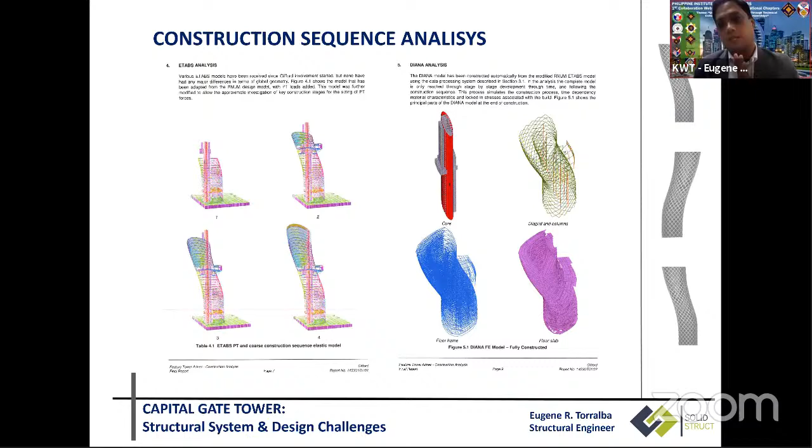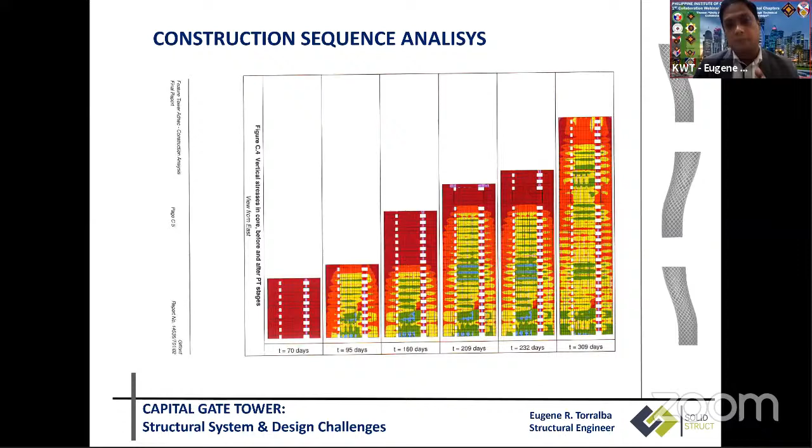As you can see, I marked here that this side of the core is always in tension, whether it's only gravity load, because of the configuration, it's always in tension. As shown in this sequence, day 70, day 95, up to time 309 days. This is based on the construction sequence. So you can see that one side is always under tension, because of the configuration of the structure. This part is always in tension.

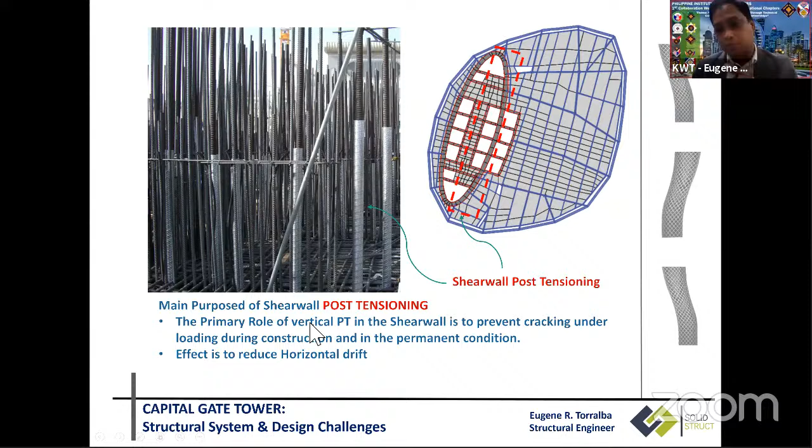So they decided to introduce the post tensioning on this side only. What is the post tensioning? The main purpose, or the primary role of the vertical PT in the shear wall, is to prevent cracking under loading during construction and in the permanent condition.

If we can eliminate the cracking, the first benefit we get is its effect on the horizontal drift, which is our main concern, because without this pre-camber and PT, we cannot solve the horizontal drift. The drift ratio is always more than the allowable set by the code.

This schedule was also first agreed with the contractor before we did the load sequencing, because this has to be followed, otherwise we would have to repeat the construction sequence analysis if the contractor doesn't follow the agreed sequence.

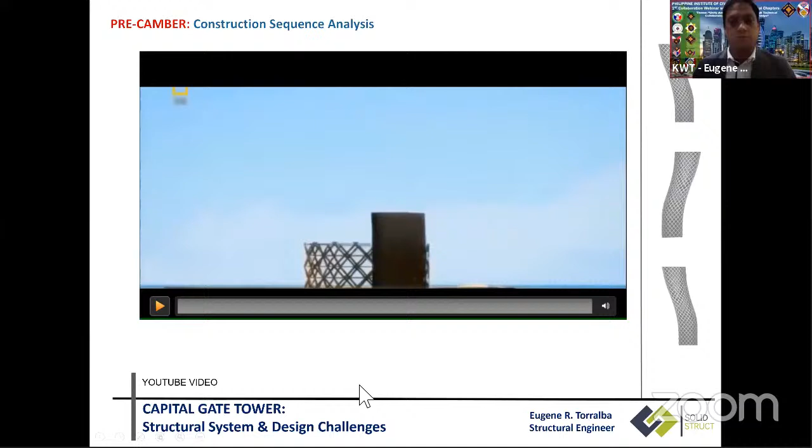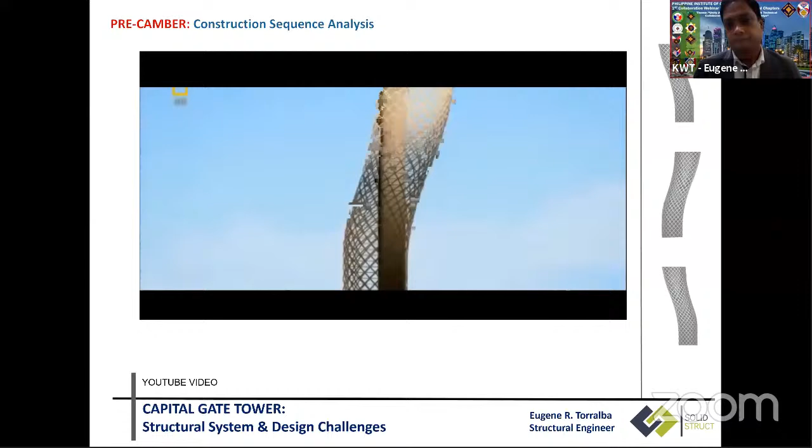It's one video. The first part of their plan is to build the core with a curve bending in the opposite direction to the building's lean. As the structure grows, its weight pulls the core straight. In total, it shifts 350 millimeters, and the effect is significant. The concrete that would have been stretched by the overhang's pull will now be compressed and strengthened.

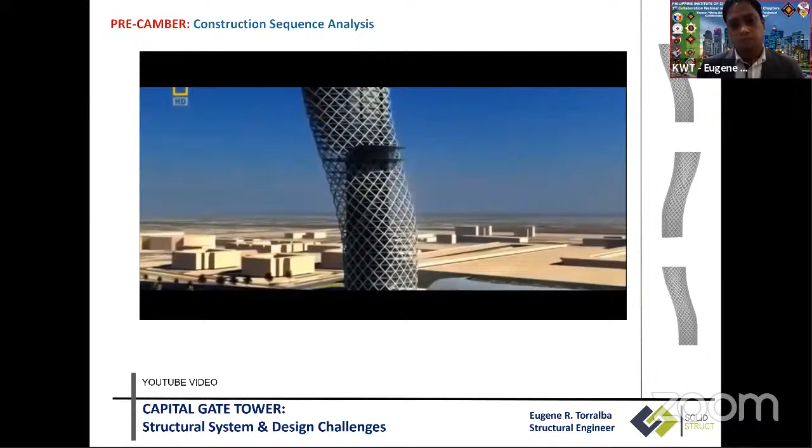Okay, so that means, let me go back to this video, we pre-camber the core. And we expect that when it reaches full load at the top, especially because of the large eccentricity, we expect that even though it's pre-cambered, the core will straighten, because after you introduce all the loads.

Remember we constructed this elliptical core wall pre-cambered, but we didn't yet have the complete loadings. So it won't move until you reach the point where the finishing is in place, the facade is in place, which will happen much later to be achieved. So in the analysis, we assumed the pre-camber on the premise that once the floors are completed, at least most of the loads would straighten it back to the straight position.

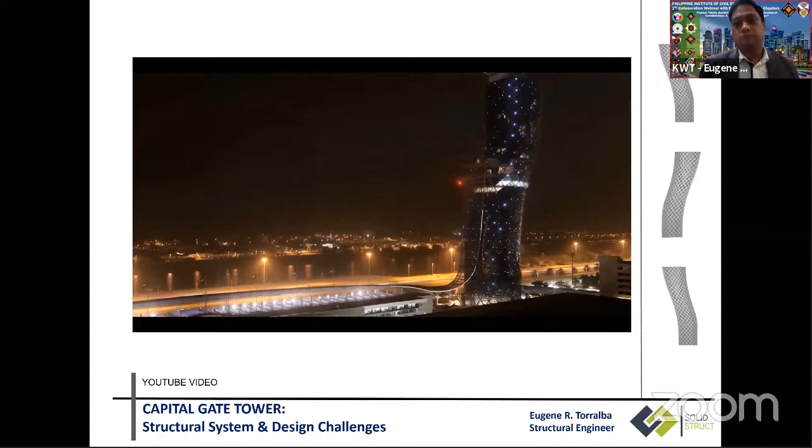Okay, so basically this is the last part of my presentation for today on the structural system, and I hope you gained some idea of how we solved this tower, this project, which happens to be in the Guinness Book of Records for the most leaning man-made tower at 18 degrees.

All right, that's it, Engineer Eugene. Thank you very much for your very detailed presentation. That was very difficult to prepare. Let me ask, did you not drink while you were doing that?